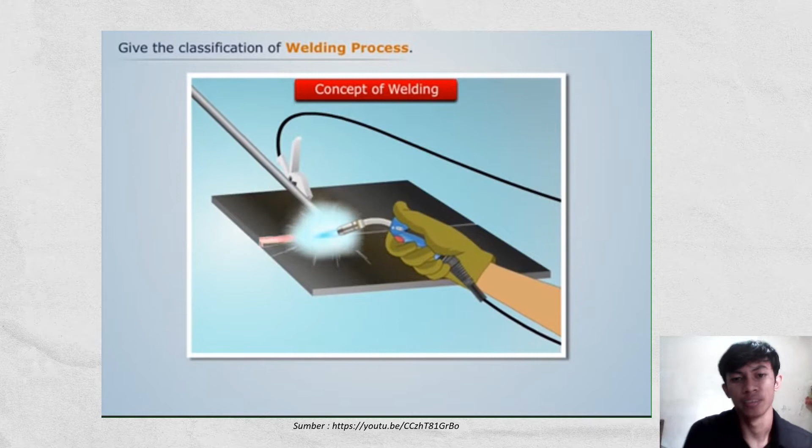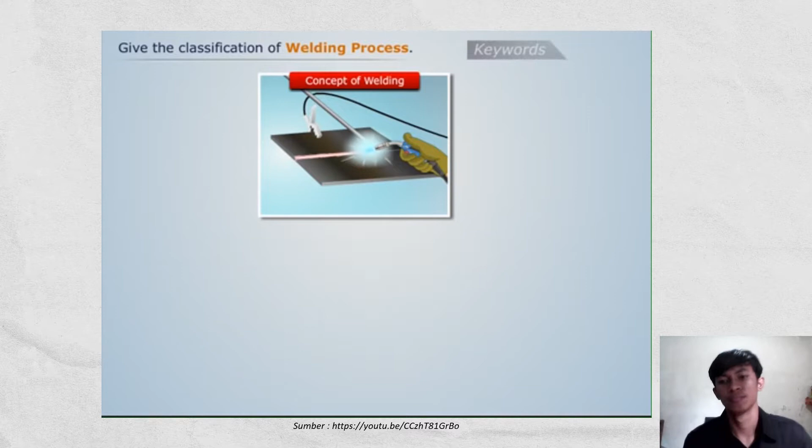Give the classification of welding process. We have studied how to join two metal plates through welding. We know that to join two metal plates, heat and pressure is applied wherever necessary. Thus, we can say that heat and pressure are the two factors on which the welding of metal depends. On the basis of these two factors, welding process can be classified as fusion welding and pressure welding. Let's first understand what fusion welding is.

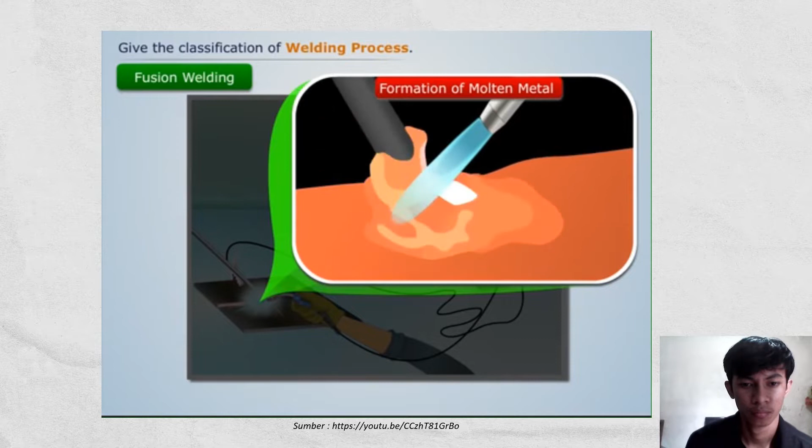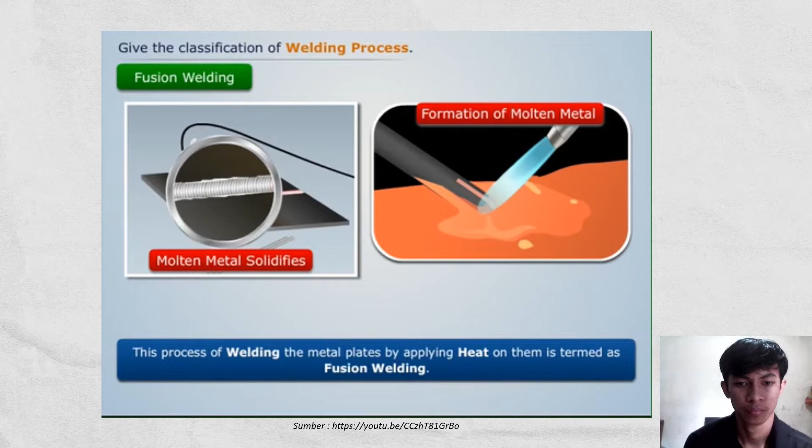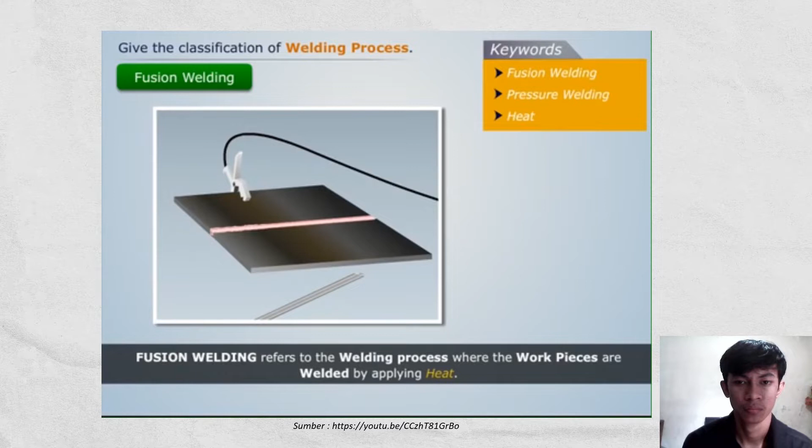Let us join these two metal plates along their edges. First, place the welding torch and filler rod above the edges of the plates and start the welding process. We see that due to heat from the welding torch, a large pool of molten metal is formed. This pool consists of the molten metal from the metal plates and the filler rod. Now, as the welding torch and filler rod proceed along the edges of the plates, the pool of molten metal solidifies. This process of welding the metal plates by applying heat on them is termed as fusion welding. Thus, fusion welding refers to the welding process where the workpieces are welded by applying heat.

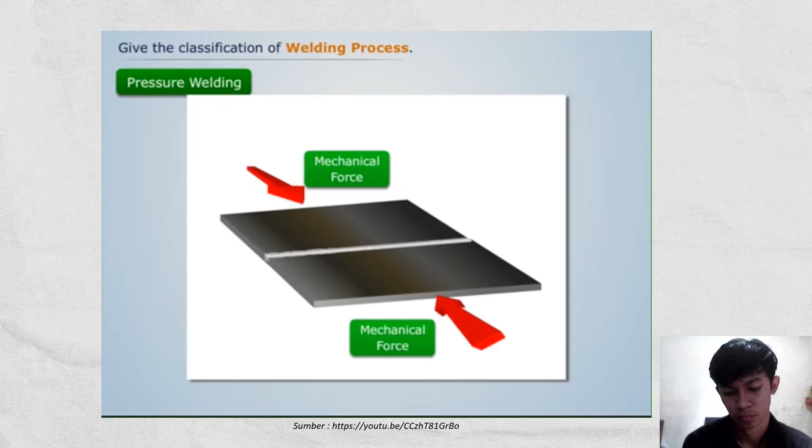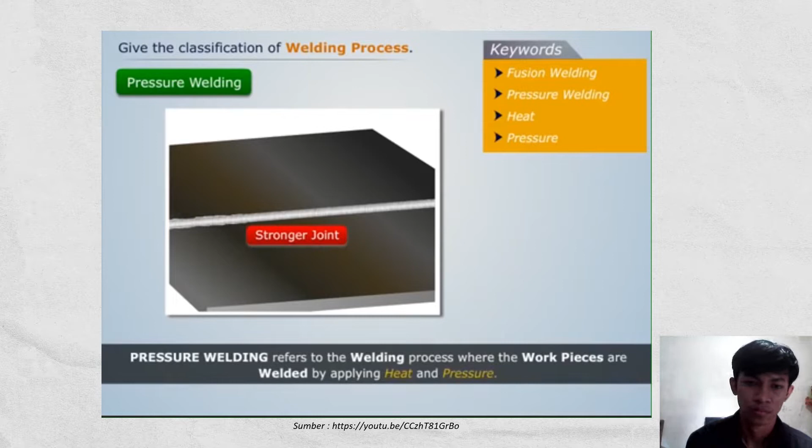Now let us understand what pressure welding is. Let us join these two metal plates. To join these metal plates, follow the same process as in fusion welding. Then at the end, apply some mechanical force on the plates towards the weld joint. Due to force, we see that a pressure acts on the weld, and this makes the joint stronger. This process of welding the metal plates by applying heat and pressure on them is termed as pressure welding. Thus, pressure welding refers to the welding process where the workpieces are welded by applying heat and pressure.

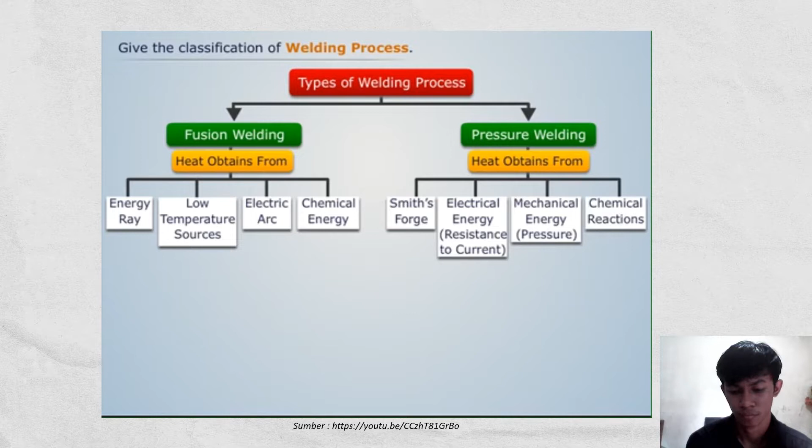Fusion welding process obtains heat from the energy ray, low temperature sources, electric arc, and other chemical energy. And pressure welding process obtains heat from the Smith's forge, electrical energy, mechanical energy, and chemical reactions. On the basis of the heat source, fusion welding is further classified as, and pressure welding is classified as. Give the classification of welding.

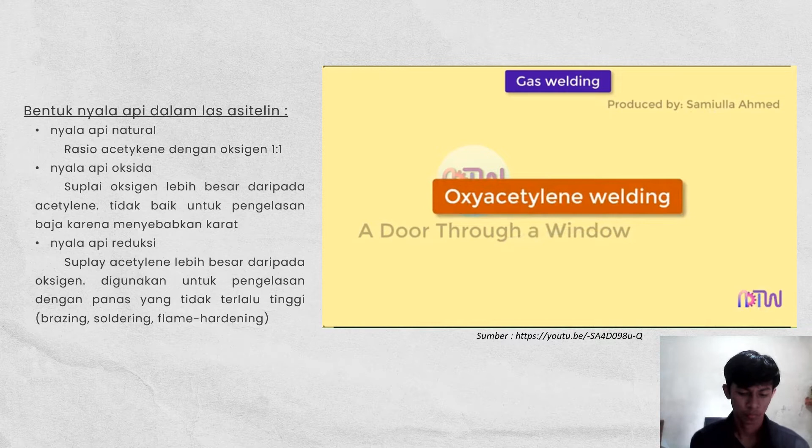Gas welding is a welding process that melts and joins metals by heating them with a flame caused by a reaction of fuel gas and oxygen. The most commonly used method is oxyacetylene welding due to its high flame temperature. In this video we will cover the following about gas welding: equipments of oxyacetylene welding, working, advantages, disadvantages, and applications.

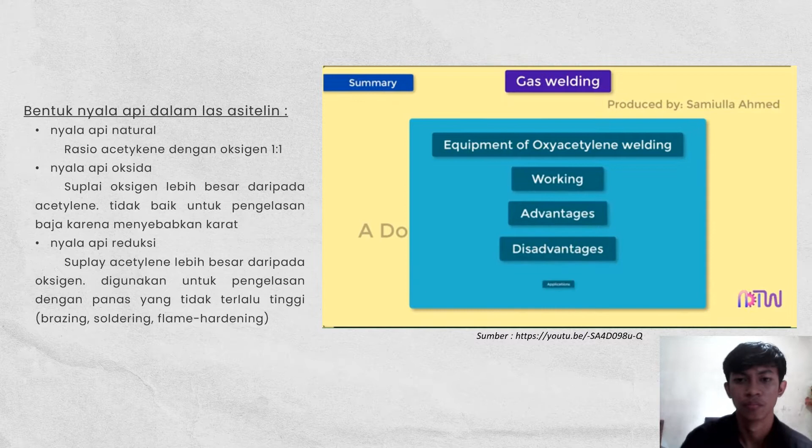Gas welding equipments. Cylinders. In gas welding, there are two cylinders. One is a fuel gas and is of maroon color. The second one is oxygen gas and is black color. Oxygen and acetylene are stored under pressure in a steel cylinder. They are sized by the amount of oxygen or acetylene that they hold. Cylinders should always be secured and used in the upright position. When a cylinder is not being used, the valve cap should always be in place.

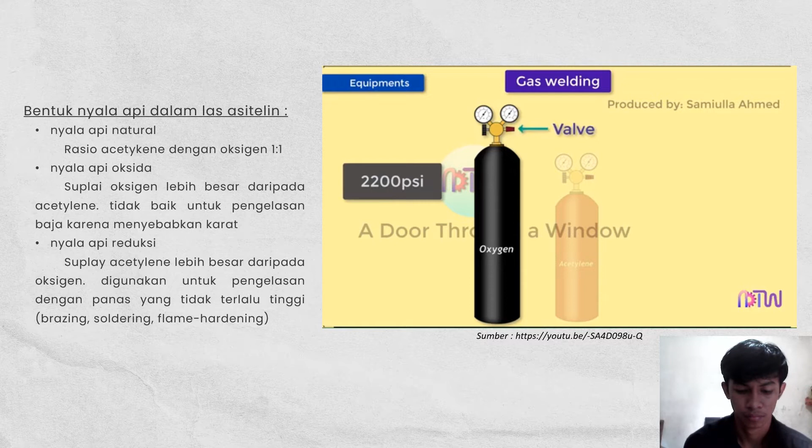Oxygen cylinders. They contain compressed oxygen at high pressure that can be as high as 2200 psi. All cylinders have valves and are fitted with a screw-on steel cap that protects the cylinder valve when the cylinder is not in use. Acetylene cylinders. These cylinders contain acetylene under pressure, made of steel and have cylinder valves. The cylinders contain porous filler material, which is filled with acetone, that allows the acetylene to be safely contained in the cylinder at 250 psi.

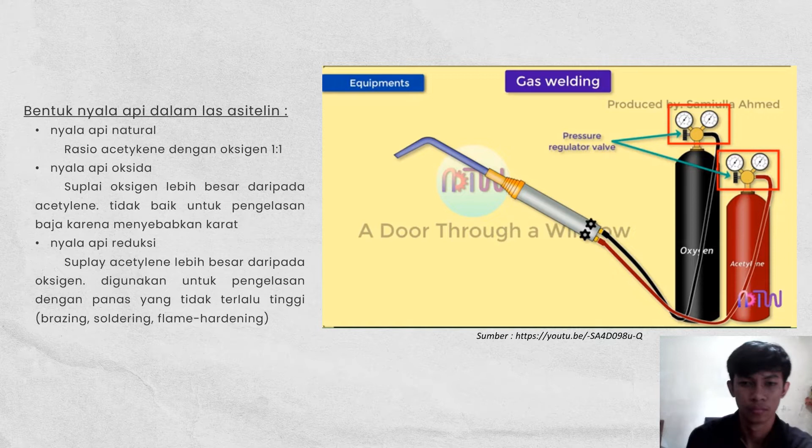Acetylene should never be used at a pressure that exceeds 15 psi, as it becomes highly unstable, which depending upon the condition could cause it to decompose and explode. Pressure regulators. For welding, the oxygen and acetylene are required at low pressure, but in the cylinders, they are filled in high pressure. So a pressure regulator is required to control the pressure of oxygen and acetylene before reaching the mixing chamber. Torch. The torch consists of the handle, oxygen and the fuel gas valves, and the mixing chamber.

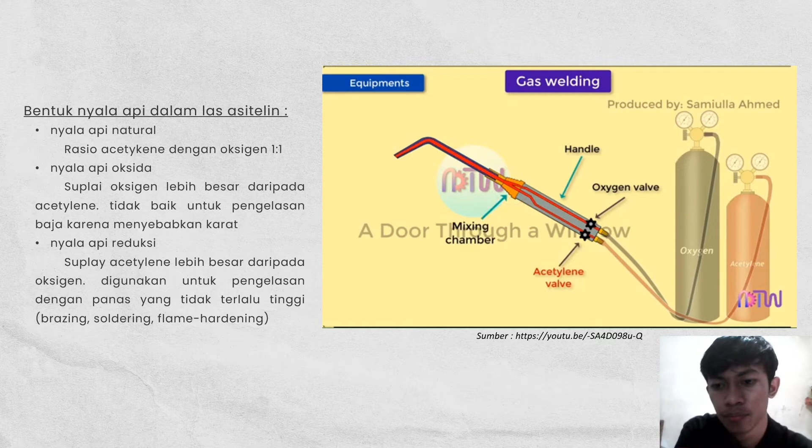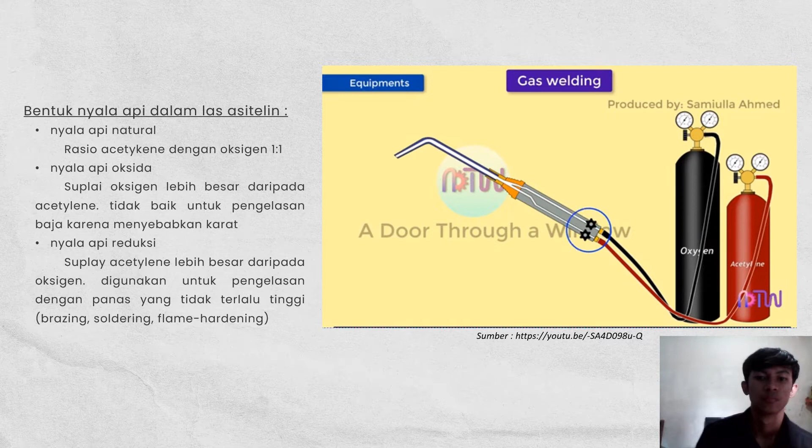Inside the handle, there are tubes through which the oxygen and fuel gas flow. Mixing chamber. In this chamber, oxygen and fuel gas are mixed. In this mixing chamber, the ratio of oxygen and fuel gas is mixed according to the type of flame required, such as neutral, oxidizing or carburizing flame. Control valves. There are two control valves available in this torch. One is for the oxygen, and the second one is for fuel gas. These control valves are used to control the flow of oxygen or fuel gas to the mixing chamber.

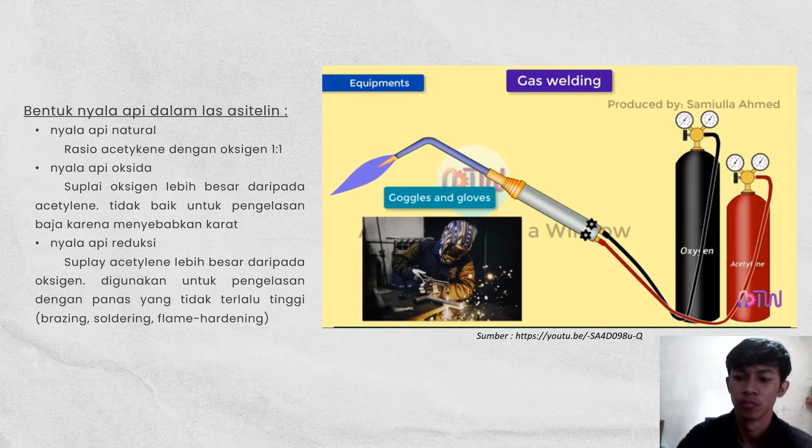Gas hoses. The gas hoses are used to transfer oxygen and fuel gas from the cylinder to the welding torch. These hoses are color-coded for easy identification. This color coding varies from country to country. Nozzle. The mixture of oxygen and acetylene comes out of this nozzle. The mixture of these gases comes out in pressure from the nozzle and then is ignited by the striker. Goggles and gloves. In gas welding, goggles and gloves are used for the safety of the operator who does welding. They are used to protect the hand and eyes of the welding operator from radiation and heat of the flame.

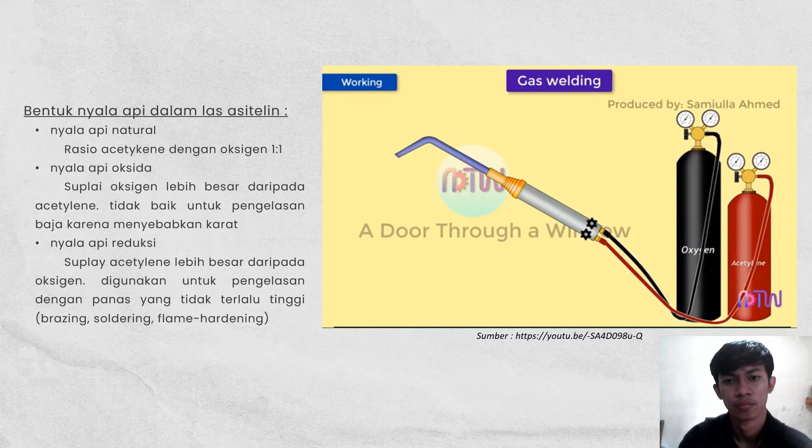Working of gas welding. At first, all the equipment of gas welding is fitted properly and carefully. After that, a regulated pressure of gas and oxygen is supplied to the torch where they are properly mixed. The mixture of fuel gas and oxygen is then ignited by the striker. Then the flame of the torch is controlled by different valves present in the welding torch. Based on the type of flame required, the valves are operated accordingly.

If the neutral flame is required, then both the valves are opened equally. If the oxidizing flame is required, then the valve of oxygen is opened more. And if the carburizing flame is required, then the valve of the fuel gas is opened more. The flame is set as neutral, oxidizing, and carburizing based on the metal, its thickness, and some other welding conditions.

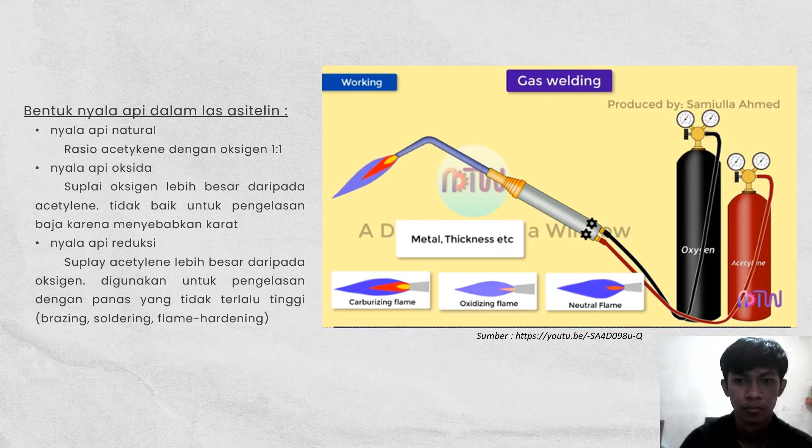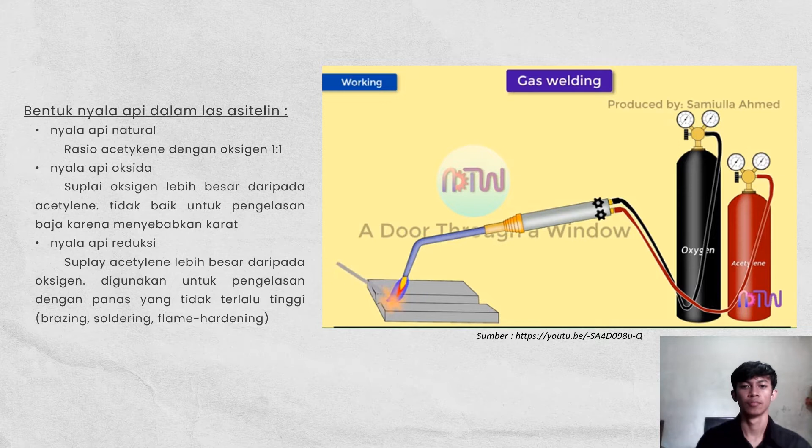After that, the flame of the welding torch is moved along the line between the two metal plates. Along with the metal plates, a filler rod is also used, which is used to create a pool of molten material that will fill the gap between the two metal plates interface. The filler rod is moved along with the flame, kept at an angle of 30 to 40 degrees according to the welding technique being used. After moving the flame and filler rod along the line of the two metal plates interface, the two metal plates join together because of the melting and solidification of the metal plates interface and the filler rod.

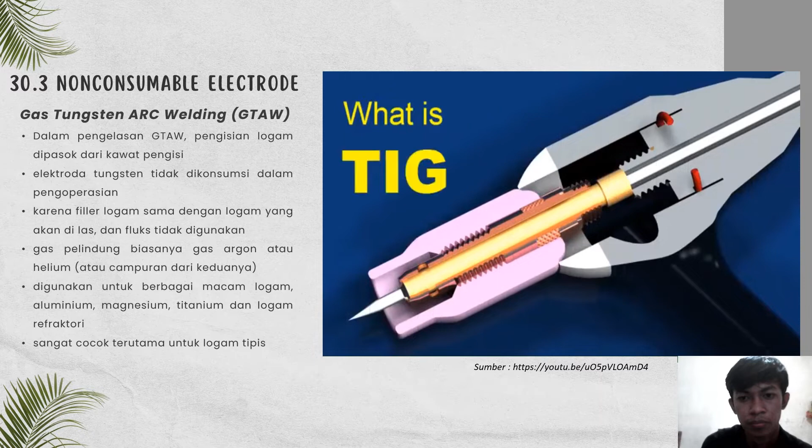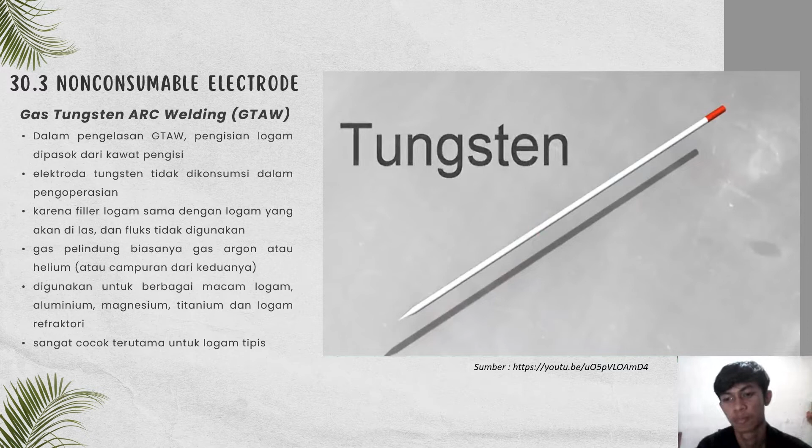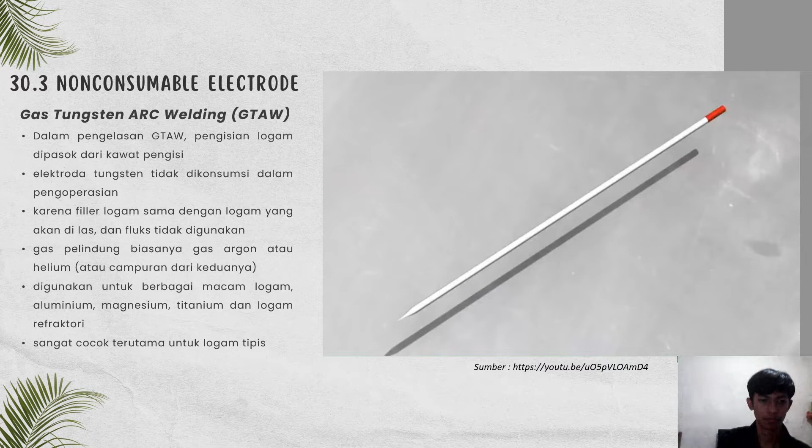What is TIG welding? TIG stands for tungsten inert gas welding. The American Welding Society calls this process gas tungsten arc welding, or GTAW. You might also hear it called heliarc welding. TIG welding uses a tungsten electrode, and tungsten has an extremely high melting point. When you TIG weld, the electrode gets hot, but it doesn't melt. We say that it's a non-consumable electrode. That doesn't mean it lasts forever, it just means that it doesn't melt and become part of the weld. In a lot of other welding processes, the electrode melts and becomes filler metal. Those are consumable electrode processes.

Here's the tungsten electrode being held in a TIG torch. The electrode slips into a collet, and the collet tightens up against the collet body. You can adjust the length that the electrode sticks out of the holder by loosening up the end cap. When you tighten the end cap, the collet clamps down on the electrode.

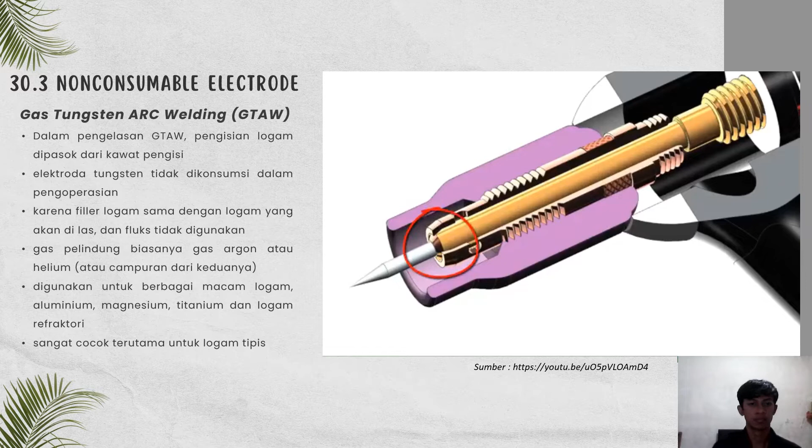TIG works by melting the base metal, which is the metal that makes up the two pieces to be joined. The heat is generated by an electric arc that forms between the base metal and the tungsten electrode. You can control the amount of heat with a foot pedal or with a thumb wheel on the torch. For most metals, current is direct current, or DC. DC is like the current flowing from a car battery. One wire is always negative and one is always positive. In DC TIG welding, the electrode is usually negative and the workpiece is positive.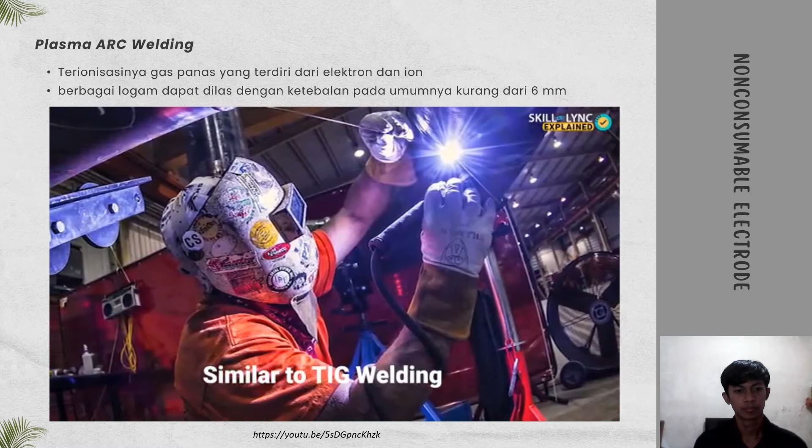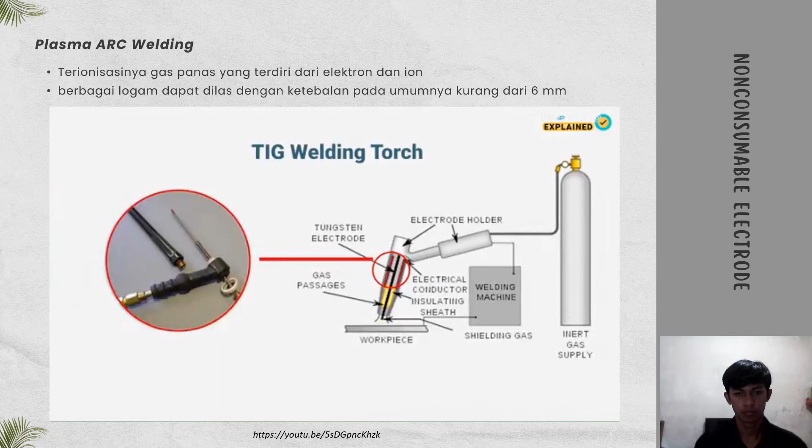Plasma arc welding. It looks like a very fancy name for a welding process. Plasma arc welding is a type of arc welding procedure which uses plasma to weld metals and materials. The working of this welding type is very similar to that of TIG welding. Normally in TIG welding, a tungsten electrode is used to strike an arc between the welding apparatus and the workpiece. In plasma welding, the same thing is done, but in a different manner. We'll explain the whole concept by comparison. In a regular TIG welding torch, we have a tungsten electrode, the pathway for the shielding gas, and the handle for the user to hold it. When the power is switched on and the torch is brought close to the workpiece, an arc is struck.

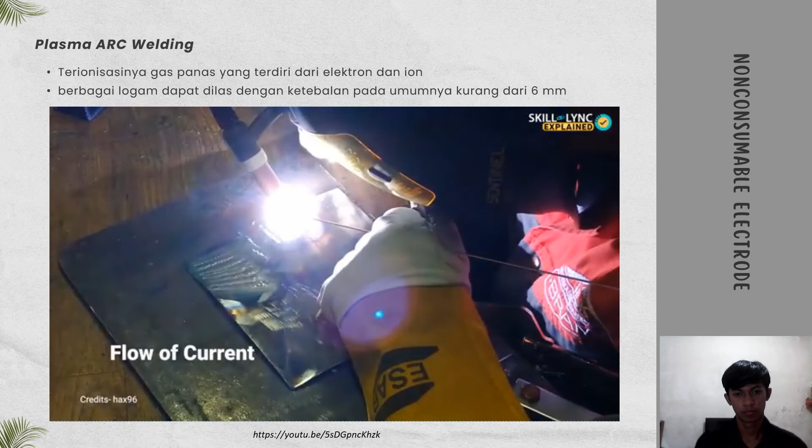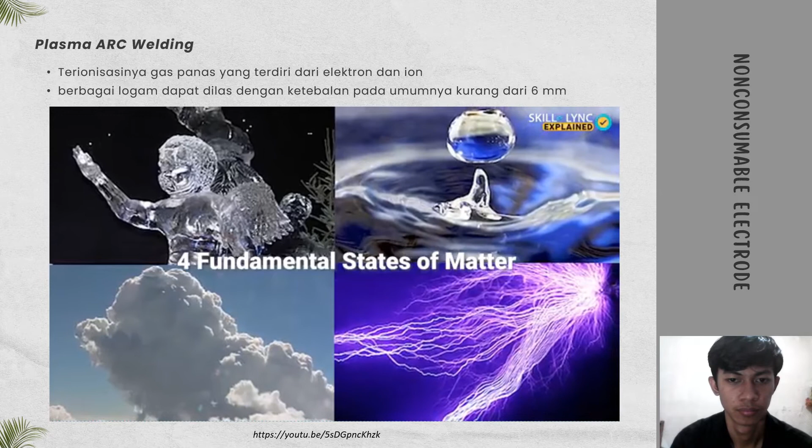This is due to the flow of current. Electricity jumps from the electrode and onto the workpiece to close the circuit. During this, it ionizes the air in the gap. Due to the resistance air offers to the flow of current, the temperature of the arc increases. The bright and hot arc is also known by another name called plasma. Plasma is generally considered the fourth state of matter after gases, liquids, and solids. A great example of plasma is lightning. Whenever there is a heavy downpour of rain, we often see a flash in the skies. This is nothing but partially ionized gas which forms plasma.

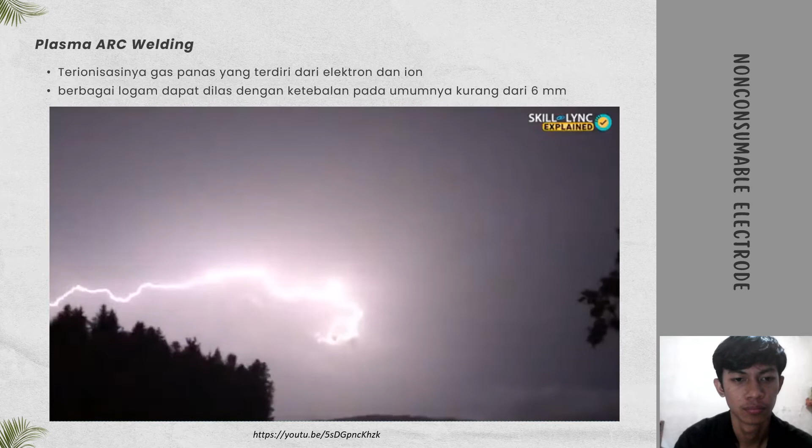The specifics behind this are very complicated to explain in a single video, but this should suffice to give you a brief understanding of what plasma actually is.

In plasma arc welding, the construction of the torch is totally changed to increase the temperature of the arc. The tungsten electrode is placed inside a specially designed nozzle that focuses a stream of inert gas moving at high velocity into a constricted and narrow path.

When an arc is struck, the inert gas is forced to flow through the region of the arc. This causes the gas to ionize due to the electric arc and form plasma. The arc and the plasma then flow through a narrow constricted opening. The sudden decrease in the flow area increases the velocity and the temperature of the plasma arc.

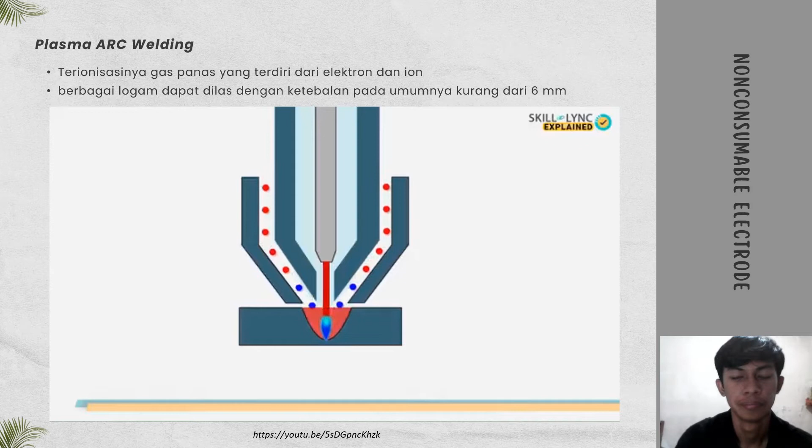They exit the nozzle at almost the speed of sound and also reach temperatures of more than 13,000 degrees centigrade, hot enough to melt any known metal to mankind. Because of this, the torch is always cooled by circulating water through the handle.

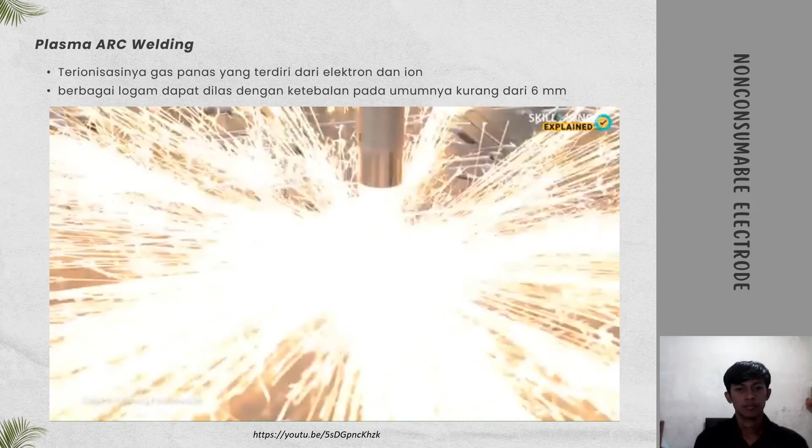A very big advantage of this welding is that it can also be used to cut metal with very minor changes to the torch design. The shielding gas is replaced with an oxygen blast, which is used to chip away any metal oxides formed during the cutting process. The final cut is very clean without any unnecessary chipping.

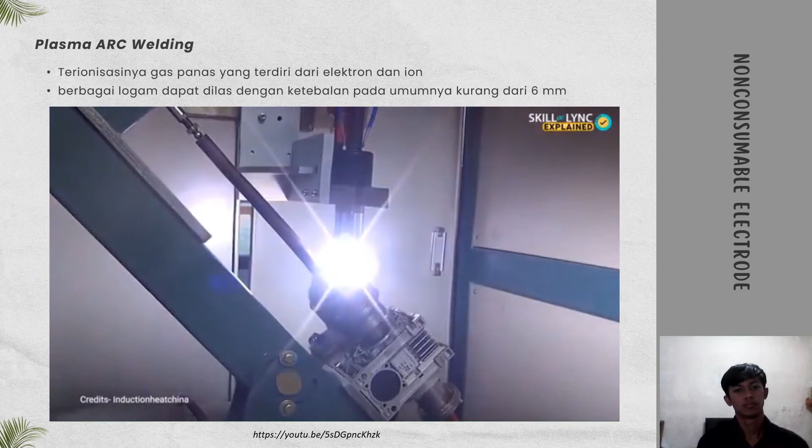Although this method was developed way back in the 1960s, it is not widespread. The main reason being the high cost of the welding equipment. The torch also needs to be made with special provisions for water cooling due to the extremely high temperatures of the plasma. This makes it rather difficult to manufacture and ends up driving its cost up.

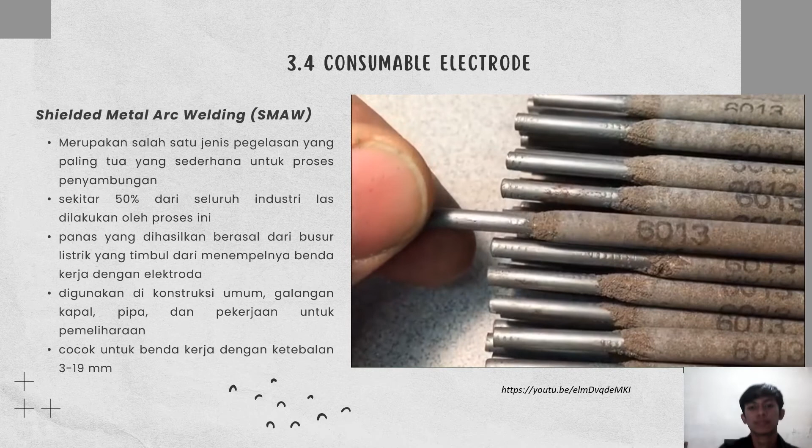The American Welding Society calls this process shielded metal arc welding, or SMAW. You may also hear this process called manual metal arc welding, or MMA welding. Some people refer to this process simply as arc welding, but shielded metal arc welding, or stick welding, is just one of many types of arc welding.

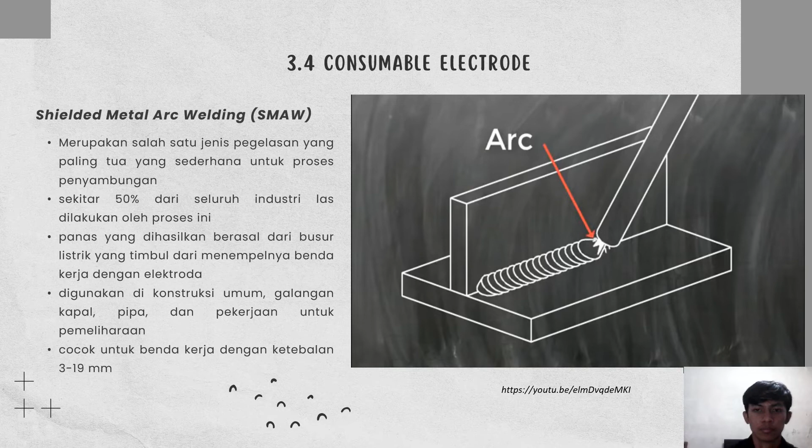In stick welding, an electric current flows through a metal electrode or stick. An arc forms between the end of this electrode and the workpiece. The arc melts both the metal in the rod and the metal in the pieces to be joined. The metal from the electrode is ejected into a molten weld pool and mixes or coalesces with the workpiece.

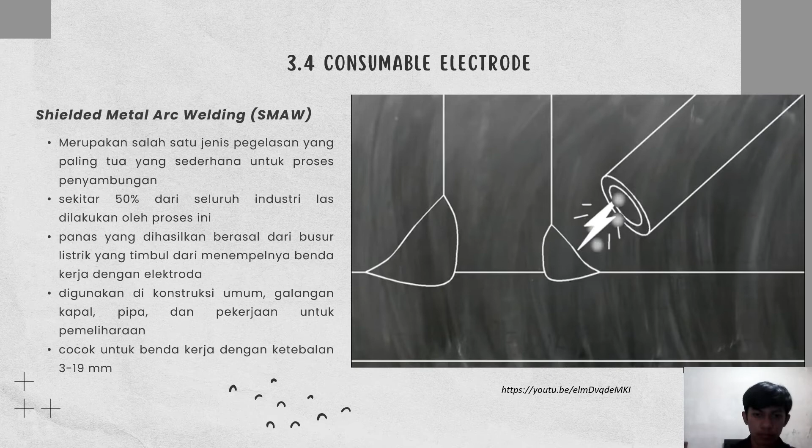The metal in the workpiece is called the base metal, and the metal added to the joint from the electrode is called filler metal. Stick welding always adds filler metal to the joint. Because the electrode is constantly melting away and becoming part of the welded structure, stick welding is known as a consumable electrode process.

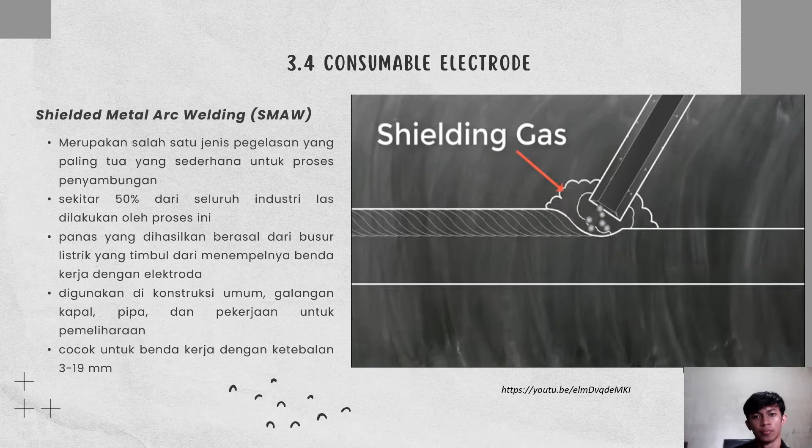As the electrode is heated by the arc, some of the covering of the electrode releases protective gases that shield the weld and help stabilize the arc. The remaining covering melts and covers the molten weld pool with a protective slag layer.

This slag layer protects and helps shape the weld as it solidifies, but it must be removed when the weld is cool. Since the gases generated by the flux covering are able to completely protect the molten weld, there is no need for other shielding equipment such as high-pressure gas cylinders, regulators, or hoses.

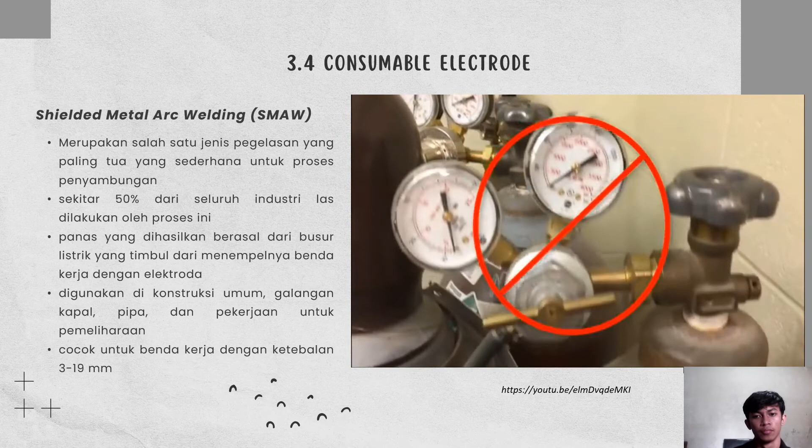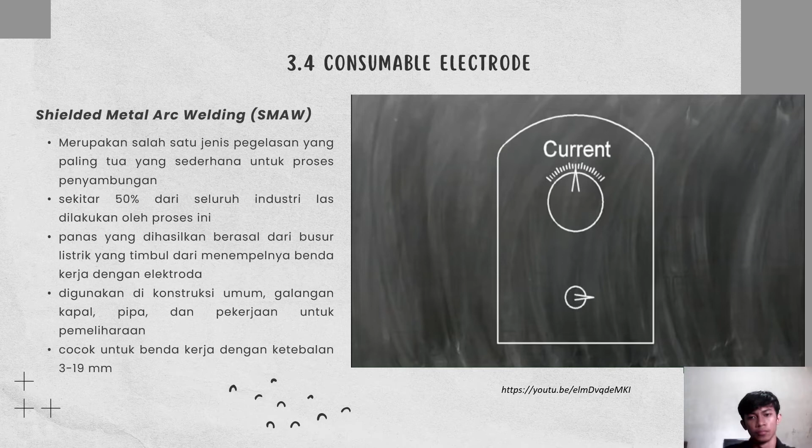Compared to other welding processes, stick welding equipment is often very simple. Sometimes the only controls on the machine are current and polarity. Many important welding variables come from how the person doing the welding positions and moves the electrode. For this reason, the quality of welds produced by this process depends greatly on operator skill.

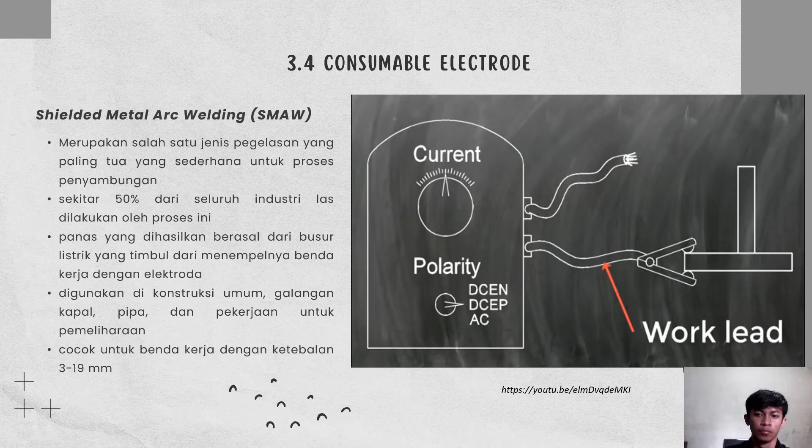In stick welding, two insulated wires are connected to the welding machine. One lead goes to a clamp, which is connected to the work—this is called the work lead. The other wire goes to an electrode holder, where the uncovered or grip end of the electrode is placed.

The polarity of the welding setup refers to how the electricity flows from the machine to the workpiece and back. The current will either be AC or DC. In AC, or alternating current, the direction of the flow of electricity changes direction many times every second. Direct current, or DC, is like the flow of electricity from a car battery—one lead is always positive and the other is always negative.

DC can be set up two ways in stick welding. One way is DCEN, or DC electrode negative, often called straight polarity. In DCEN, the electrode is connected to the negative terminal and the work is connected to the positive.